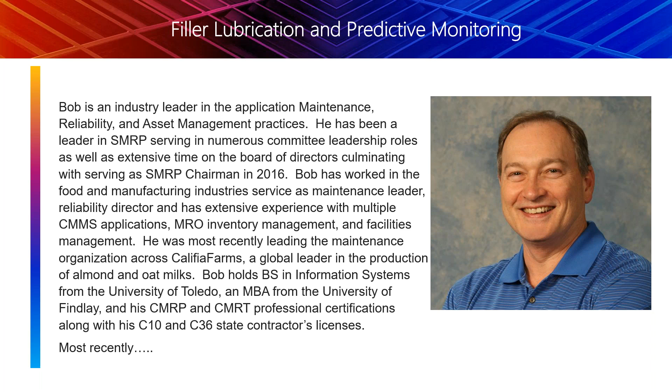The issue pertains to these star wheels—the two bearings that support them have a very big impact on the equipment. Once they start getting loose, the higher the speed, the bigger the issue they can cause with jams, especially if the bottles get very small. These are all change parts; they get changed out depending on bottle size. Once they become very loose, you can't even run it—it's a jam every 2-3 minutes. So taking it down to work on it takes quite a bit of time.

So we're going to talk through this again. This is sanitary equipment, for almond and oat milk at the plant. Just to give background on the plant's growth, it was double digit for basically over 10 years now in production. Plant-based products are really growing and taking off here in the States and elsewhere in the world. There are other facilities that Califia has throughout the world, and the growth has been very large everywhere. The plant itself really has a lot of emphasis on reliability, but of course there's also a lot of emphasis on meeting production demands and not shorting any customer orders. So it's a fine balancing act.

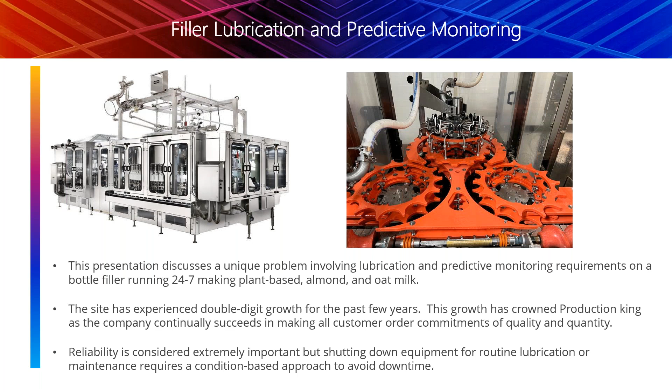So this is the machine—again, a little bit different view of it, different model, a little larger. The way these machines work is they take a bottle in and spray it with a sanitizer. The bottle is in the upright position, flushing it with a sanitizer to clean it. In the next station, they'll take the bottle and flip it upside down, taking the benefit of gravity because gravity works, and they want the sanitizer to rinse out. There's nothing in the sanitizer that can hurt you, but it will clean out any microorganisms that could pose a problem. Then the bottle gets rinsed with something like reverse osmosis water—they refer to it as nano water, sterile water—and then it's filled.

There's a little video on the bottom here I'm going to try to play, and this is the part where, as Maureen said, we're live, so you might see an interesting ad as we bring this up. Let me do my best so you can see. This is about a little over a minute long, and you can actually see a glass bottle line, but at least you'll get an idea of what a filler is doing.

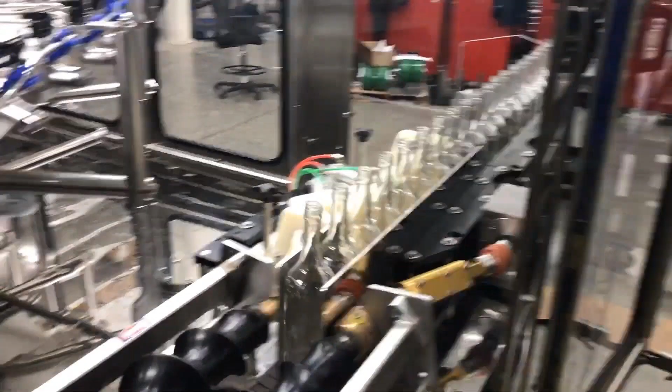So this is a glass bottle line, and this is the in-feed opener to let the bottles into a feed screw, or auger, as some people might call it. It comes into the machine and goes into a star wheel that's timed with what's often referred to as the pincer. The pincer picks it up and inverts it, so if there was any liquid inside, whether rinsing or sterilizing, it basically dumps it out, allowing sufficient time for the majority of the liquid to come out. In the case of Califia, we would wash, then rinse, then fill.

And then it's moved into the filling units, where again we're relying on gravity. As the bottle goes onto a pedestal, it's lifted up and triggers the valves by lifting up on the valve stem, opening up the product to come into the bottle. There are also some ports in here to allow air out.

Again, in this case, a very large star wheel receives the bottle so it can be brought out for sleeving, and then of course for capping. This stage here is just putting the cap on, and then it's rotating. You'll notice it's rotating in a clockwise position, tightening the cap.

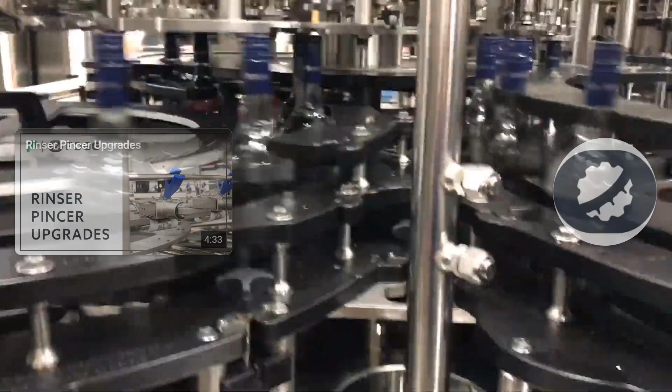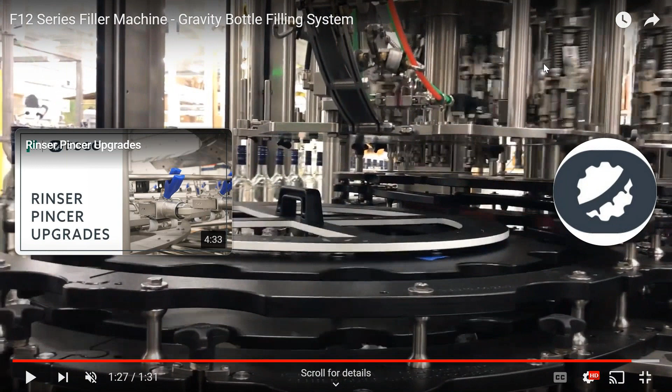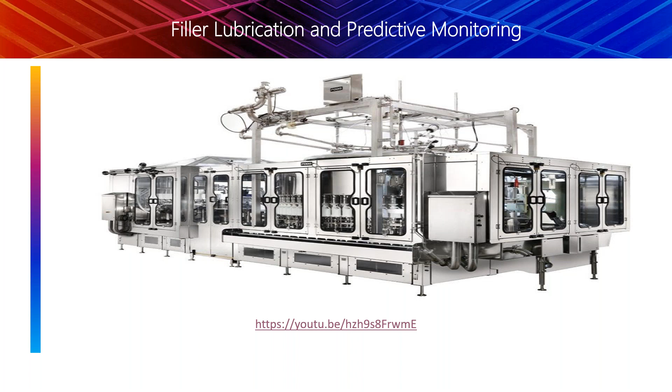So that is the bottling process. The star wheel there was a little bit larger than what I had at Califia, but not by much. The speed of that was about 75 to 95 a minute. I didn't really check it there, but at those speeds they seem relatively slow. However, I've seen bottling speeds—a neighboring plant next to Califia was well over 300, and Califia itself is easily in the mid 200s. So much, much faster, in the area of 3 to 4 times.

So I'll just put a little quick problem statement here, and then we'll get into it.

But as this plant got busier and busier, they did not want to give us the machines. We were getting less and less time to work on them. The problem was, if we started to lose one of the many star wheels in the machine—there were two machines, one with 9 and one with 12—it could take quite a bit of time, sometimes over 4 hours, to actually repair it.

We thought about using vibration analysis, and actually a farming facility near us, which had a filler for carrot juice and some other juices, tried vibration and failed. I'll explain why and show you some of the data as to why vibration did not work for us, at least not in a way that was easy to use and pretty much right on the mark that we required.

The mean time between failure was about 90 days on average. It varied a little depending on the location of the filler—in some cases we got as much as 120 days out of it. But the bottom line, because of the wet environment, the speed, and also the sanitizer solution we used—very corrosive to even 316 stainless—the bearings would loosen. One thing we did observe was that as we started getting looseness in the bearings on these star wheels, we could actually see an increase in jams. That was one of the ways we realized we needed to take a closer look at a star wheel.

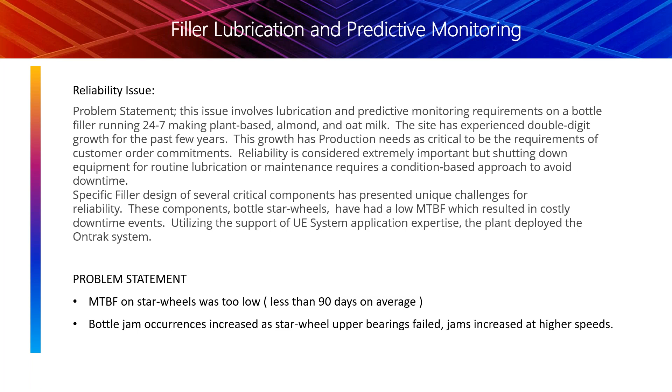And then the upright position, you see the star wheel assembly in its upright position—there's the actual filler deck. That's where we would grease, coming in below the lower bearing, a thrust bearing, and we'd have to grease through and up the chamber and out the top bearing into what they call the purge cup. Problem with the purge cup, though, was that it was inside the machine. In order to see in there while it's running, you pretty much need to open the guard door, meaning you need to stop the machine.

This is where we started running into some issues trying to lubricate the machine and keep it running as much as possible. So we had to try a couple things, like moving the purge outside, potentially, and working with the OEM on a different approach to trying to pump the grease from the bottom up through two bearings and out into that tank. Just a couple things.

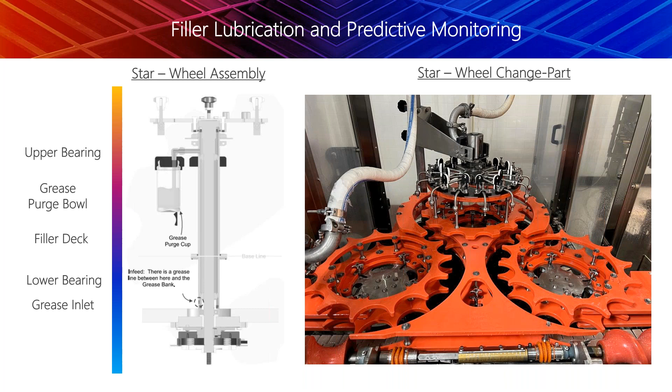And then, of course, one of the first things I did, focusing on reliability, is make sure I had the best bearings I could put in there. So that assembly, when it came apart, took quite a bit of time. I think this next slide will show you some of the feedback.

Here's the dashboard for the Ontrak system. Let me clarify a couple things here for you. This is the dashboard for our filler number one, just a layout that UE Systems gave us after a couple weeks of data, getting it normalized and looking at where we should apply the indicators: what good is, the green, the blue indicating the likely lubrication point, the yellow meaning you got a problem, and the red meaning you definitely got a problem.

As it gets into the yellow, though, we've had times where we've lubricated and not had an issue where we had to do any type of repair. The variation, though, comes from the location of the sensor relative to the bearing, but also the speed of that particular part within the machine. And depending upon where it is in the machine and what product is being run and what bottle size is being run, speeds vary.

This introduced a problem for the vibration analysis and led us away from it, just like it did at the local company that had tried it previously. And how I knew they tried it previously using vibration is because I shared the cost for the vibration company that flew out to California, and we would split their travel costs as they went in. The company went in and did the vibration analysis for the juice plant down the road from us, and then they would come over and do our vibration on our facilities, mostly utility equipment. We got to talking, and we realized they had the same exact fillers and were presented with the same problem.

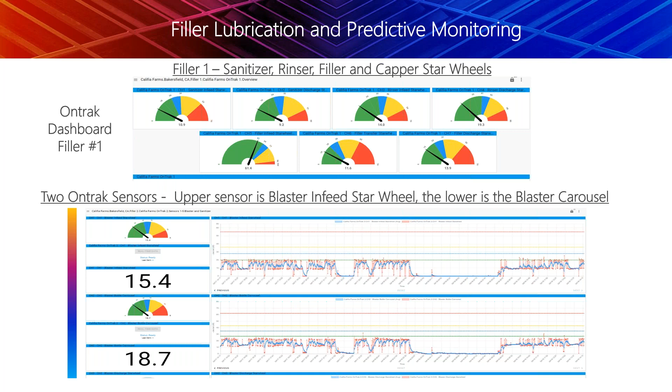So what you can see here, the blue line on the graph is the average. The red is the real-time, taken every minute. There is the capability to unlock it - it's a little hard to see, but underneath the A in caps there's a little lock. If I unlock that, I can change the timeline here and even get real-time data. I can also get this data out into a comma-delimited file.

So just a little bit more on the scenario. Mean time between failure was about 90 days on average across all the star wheels in those two fillers. It's about 4 to 5 hours, depending on which one, to completely repair. Only a few hundred dollars in parts. And then the biggest thing was the production loss.

You know, my counterpart, she was a sweetheart, but boy, when we had to go down for a maintenance related issue... Other than that, I got the issues observed leading up to the failure. On the slow speeds, like 120 bottles per minute or below, it was very hard to detect, of course, but the number was lower on the jams until the bearing went catastrophic. You could really feel looseness in it, and you'd get a jam maybe once every 5 minutes versus once an hour.

That could have been a dented bottle or something, a different variable in the equation. But above 120 bottles per minute, which was normally the case, once you had jams about every 5-10 minutes and it wasn't a bottle issue, you knew something was up. But by then it was too late - you couldn't continue to run until the next CIP cycle.

The smaller bottles - these are the three sizes they were running at the machine at the time - were really prone to jams because they ran at the highest speed and also required the most precision.

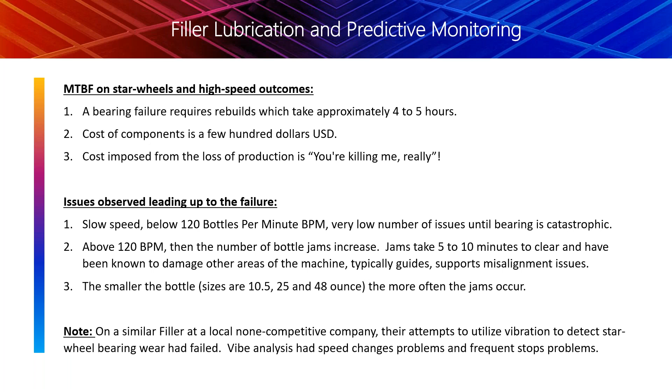I bring this up because the install took a while for us. We got everything down on a down weekend - got a down day, cleaned everything up, took advantage of the downtime, and installed everything.

So then this little question popped up: I wonder how it's going to hold up with the peracetic acid. Peracetic acid is what's used to sanitize everything inside the machine, and the acid is stronger. Just about every single one did come off, and we did everything we possibly could.

But the fix was simple. We went ahead and attached all of the sensors to their studs - that's inside that little plastic unit you still see up at the top there - but we did it with a stainless steel clamp. Works just as well; the epoxy was faster. We had to customize a couple clamps to account for different fittings going in and out of the tube that supports the star wheel and the bearings. But for the most part, this meant everything had to come back out and wait for another down weekend. This peracetic acid is part of the problem.

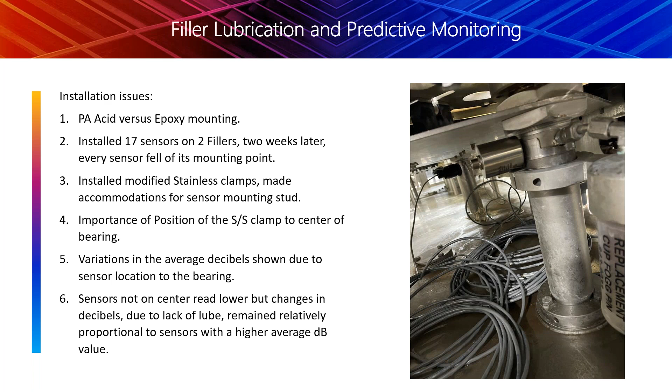So the analysis here, to get down into the lubrication part, what we had to do is, since we're up and down so much - and the reason why we're up and down so much is because the sleeves will run out about every 12 minutes - so then we have to shut down.

There's not a lot of backup between the sleever and filler. So the filler has to stop, or there's a jam, or something downstream, or it's a product change. Many product changes on one of the lines versus the other seem to run a little longer. But just a lot of up and down, which is really considered normal. As we've over time reduced issues with the sleever and other downstream equipment, it's improved quite a bit.

But you can see what we're dealing with here and how hard it would be to apply vibration to this, especially when it's up to the operator to select the speed, and depending on the size of the bottle, viscosity of the material, the product controls flow, so it might have to change speed. So it's just knowing the speed and

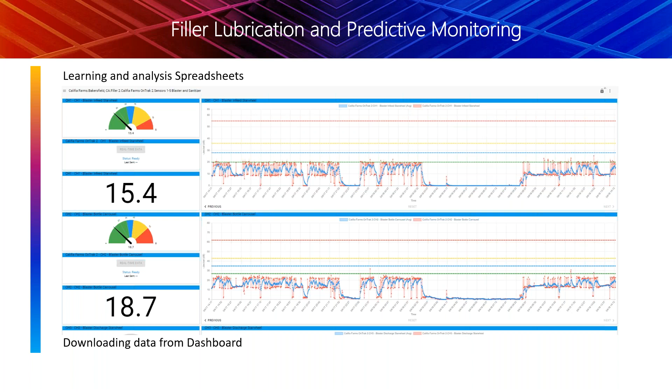So when you look at this data like this, you can download all of it. Everything that's in your view is downloadable. And then here, these two particular sensors are probably located very close to their bearings, given the higher readings here. I use this because I think this was a good example. I did have some that were below 10.

So what you have to do with Ontrak in order to get this downloaded is, once you have your time frame, you can get this drop down. You'll notice the bottom right drop down, export to CSV, which I always refer to as comma delimited.

And then from there you can put it into Excel. So what we did with this particular data is we downloaded it, and every single data point gets put in Excel with a time date stamp. We worked on this data, and from it I was able to take timeframes running its average speed and level for that particular product, and compare before the CIP with after the CIP.

So what you need to know about this data is that during the CIP, we lubricated this particular machine. And we know what the average was before we went into the CIP of this particular star wheel, and we know what the average was after. Both sets of data were in the same download.

And if you look at it and see that trough where the CIP was, you can see how the blue, the average on the left, just by eye, is higher than on the right. That's the impact of the lubrication.

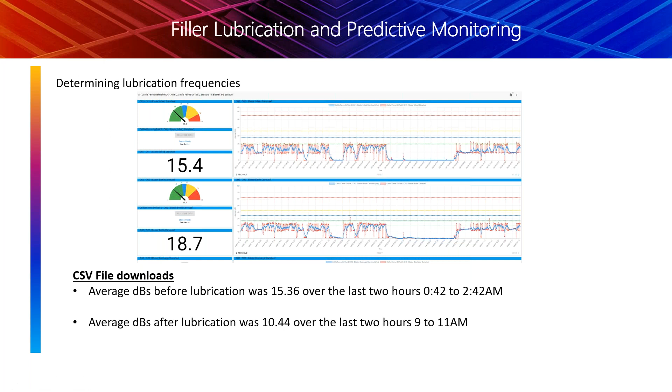So we determined, since filler 1 runs slower than filler 2, that we could actually go 48 hours before we had to lubricate. Filler 2 runs a different speed; on average it's 42 hours.

And the strategy with the CIP being at 60 hours doesn't always allow us to wait for CIP. So we've got to basically catch product changeovers or other opportunities if we want to get in there while it's down. Most of the lubrication can be done while it's running, and some projects are in play here to be able to do all of it while it's running. But there are still some things underneath that require the equipment to be down, which will probably always be on a CIP cycle.

Next steps now would be to take the remaining Ontrak sensors. So like I said, one machine used 9, one used 12. The system was purchased at the max number of sensors, which is 16 for each on-track system. So that now is going to allow us the ability to go underneath the machine and start listening to the main drive, motor, and the other gearboxes.

There's plenty of gearboxes to monitor their health as well. Now, we've been creating work orders for the lubrication and training the lube techs to look at the data. Since I left, I don't know what kind of where they are with that. Hopefully, they're at a point now they can actually do that themselves and not require somebody with a reliability background, someone other than just the technicians themselves can see the noise and also look at the dashboard. And then, of course, we'll turn on the email notifications once we're comfortable with where we set the high limits.

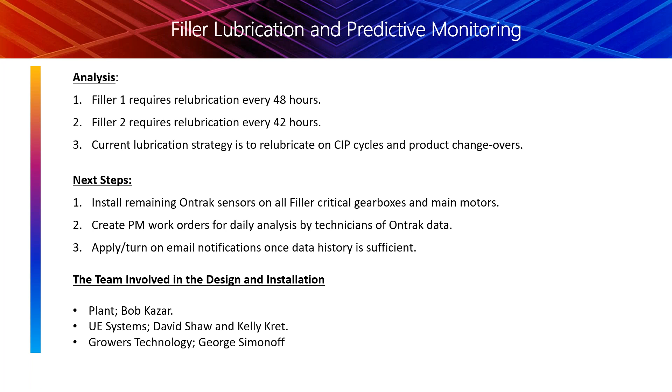So the team involved with this was myself, of course. I was the maintenance leader at Califia Farms. UE Systems was David Shaw and Kelly, which I mentioned earlier, and then the local reliability engineer from Growers Technology is George Simonoff.

The plant still uses some vibration. I'll share a few things about the plant, then I'll open it up to some questions, but just so you know, a couple other things about the site. We're using triaxial vibration sensors, transducers, accelerometers rather, and we have 39 facility items.

The blending area is where we can use the UE grease caddy and use it quite a bit. The global conveying system as well, we had a UE 10,000 there. We're building some routes for the overhead conveyors to be inspected.

We do some oil analysis. And then we're looking at an Empath system for one of the submerged wells to monitor the health of the submerged motor and pump. It was down about 768 feet. That was the water well, which, by the way, is the most critical asset to the plant.

And then the lubrication program, we started with 39 lubes. When I got there, there was maybe 10 different brand names out there. Some of the gents that have been the craftsmen and senior operators, they all had their own greases. Nobody knew why they had a certain type, but everybody was trained at a basic level of tribology. We color coded everything. We got down to 14 lubricants. And Califia in Bakersfield is a lubriplate house, all lubriplate products.

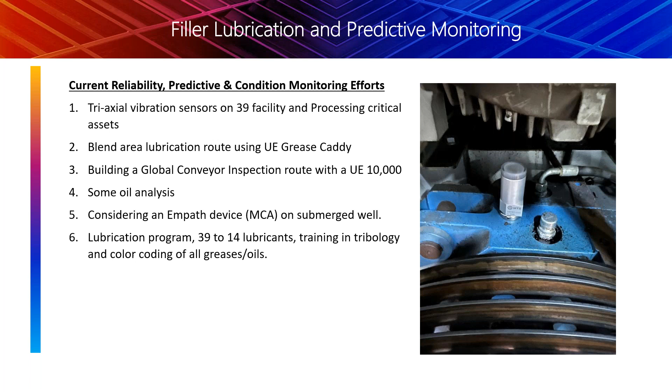An overview of the organization, just to give you some background on it. We do technical training monthly, so I'm always looking for something that's technical in nature for the maintenance guys. There's some soft skill stuff that goes on too, but a lot of hands-on technical, some in-house, some outside.

We have a skills matrix that was created for all new hires and to qualify them for production support roles as well. I think I got 4 - on my left, there were 4 that came out of the operations department that are now craftsmen in the maintenance department. We do some soft skills training on how to train or coach operators.

And then also how to deal with difficult people, because sometimes craftsmen are difficult people. And when they're dealing with a difficult person, they normally don't train very well. So we had lined out some training on how to be a good coach. And then the one thing here I'd share, I don't know why there's 2 number 4s next to it, because it's so important. I've been around for a while, and I know how hard it is now to get good technicians and keep them in facilities.

As the maintenance leader at Califia, before that, as a director at Wonderful and at Owens Corning, I hired maintenance leaders. I used to mentor maintenance leaders, help them hire good technicians. But I have to say, hands down, of all the schedules I see, this is probably the best when it comes to keeping craftspeople happy. These 3 days on, 4 days off, 4 on, 3 off, 12-hour days. Guarantees them some overtime.

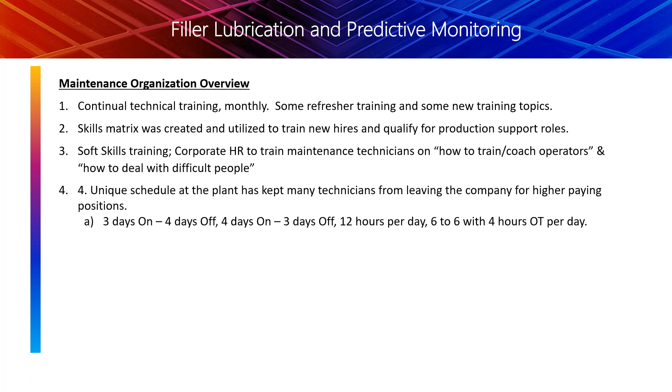And I only had one person in that whole time I was there leave. Sorry, he had to leave his hours, but he wanted some specific medical care with a local ice cream company. Other than that, everybody loves this schedule. Just a fantastic schedule in everybody's eyes. And even the individual that left told me on his exit interview that he was very sad to leave the schedule.